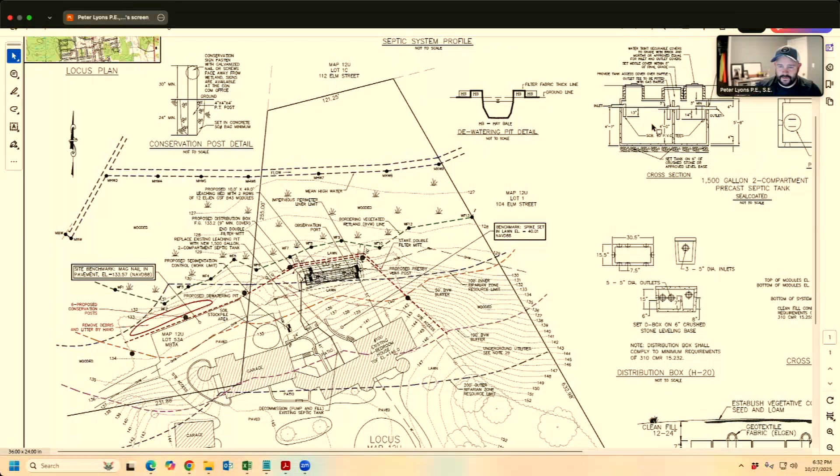As soon as you confirm we're looking at it, we'll dive in. I can see it, we can hear you. Cool, start whenever you'd like. All right, I'm ready. For the record, Peter Lyons with Collins Civil Engineering Group, representing the homeowner, Mr. Robert Langway.

We're here tonight for a notice of intent relative to the repair of a failed 4-bedroom septic system.

Looking at the plan, this is a very large property near Town Hall. This is 100 Elm Street, set on a 9.2 acre parcel set back to the north side of Elm Street.

In the back of the property, we have some mean high water delineations and the BVW associated with that. The BVW line is essentially at or just beyond the tree line in the rear of the property, delineated by Brook Monroe as flags 1 through 13.

The 50-foot buffer to that cuts the backyard in half, and the 100-foot falls through the middle of the house. The 100-foot from the mean high is right in the middle of the site where the leaching field's going, and the 200-foot outer riparian limit is at the front of the house.

The overall plan for this project is to replace all the existing septic components. If we start at the house, that'll explain why we're working towards the wetlands when we have all this property. The existing system—all the flow is combined in the house, and it comes out below grade, below the basement slab, into a septic tank and a leaching pit in the backyard.

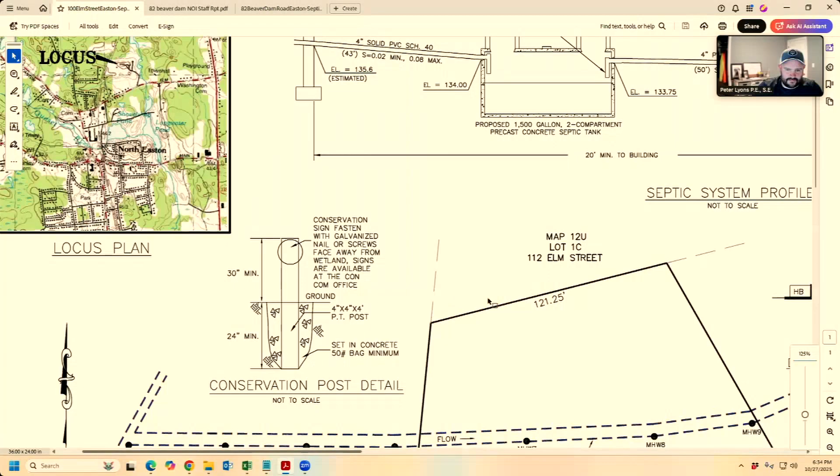I'm going to zoom in a little bit closer. Sorry for the bouncing around, but it's kind of a busy area. If we zoom in here, I just want to highlight there's a lot of underground utilities supplying from the west, supplying our property, as well as the property to the southeast. So there's some pretty heavy duty underground electric utilities crisscrossing through the backyard.

So the location we've chosen is within the 50-foot buffer to the BVW. However, it avoids the underground utilities.

As proposed, the leaching field is 21 feet off of approximately wetland flag 7. Erosion control is proposed at 10 feet off wetland flag 7. And in the vicinity of the work, we're doubling up the erosion control due to the steep topography.

Looking a little bit to the west here, this is an existing paved driveway that's going to be our site access, with a soil stockpiling area outside the 50-foot buffer, and some debris just off the pavement that are to be removed by hand.

We've provided conservation posts along basically the existing tree line. So we have conservation posts shown, and I think it's 7—1, 2, 3, 4, 5. Looks like 6 locations here.

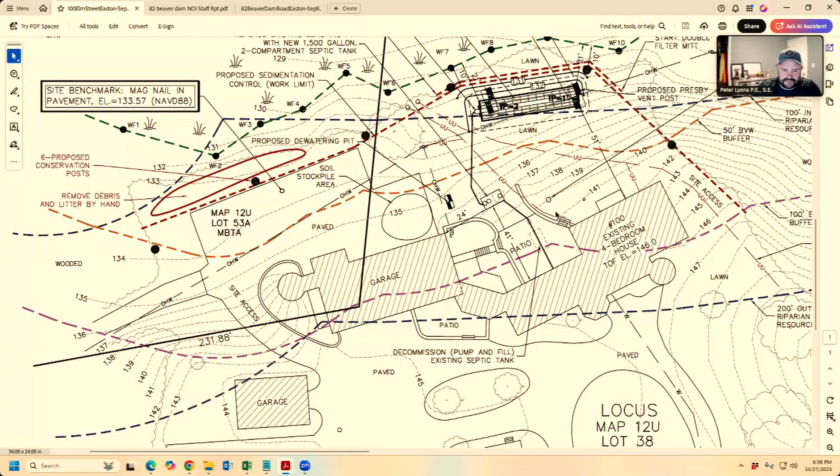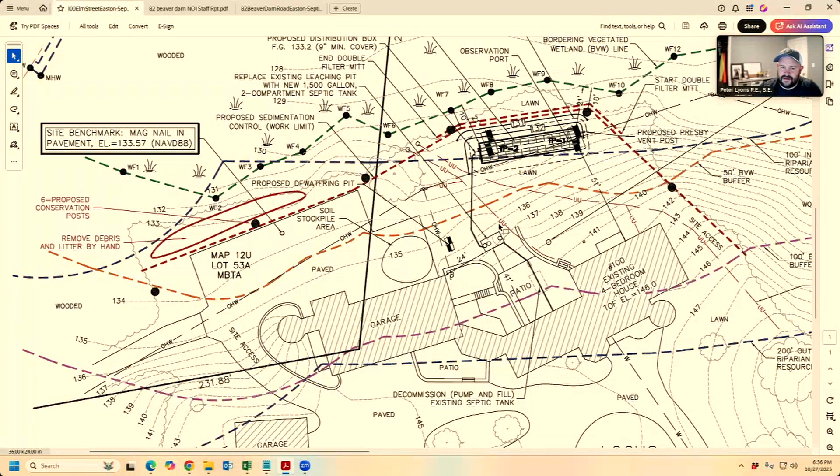Site access is going to be from the front around this paved area. There will be a little change in topography, about a foot, over the northern end of the septic system. This is all occurring in existing area. We're not anticipating the removal of any trees or vegetation associated with the construction or site access. We have provided a waiver for work within the 50-foot buffer to the BVW, indicating that it meets the public good requirement, benefit to the public good by updating a failed septic system in the vicinity of a wetland, in the buffer zone specifically.

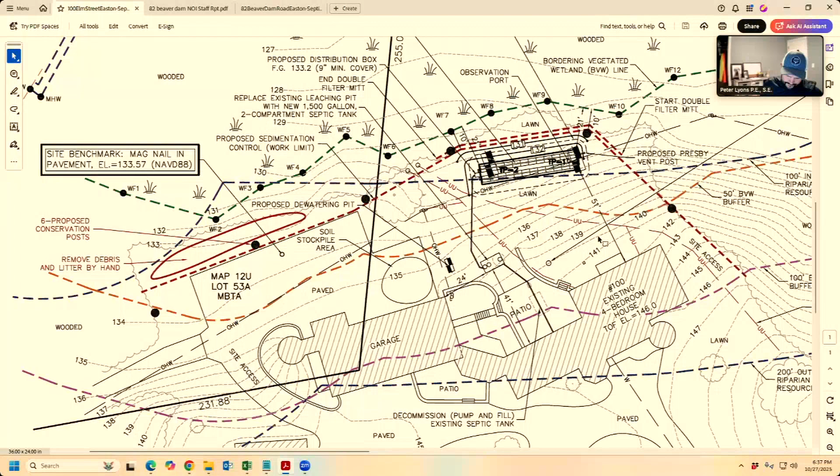Regarding the staff report and comments, just looking at this, I want to make sure this is the most recent plan, because it's not. There's a later plan, we proposed some plantings and stuff. Apologize on that, I can try to pull it up quick.

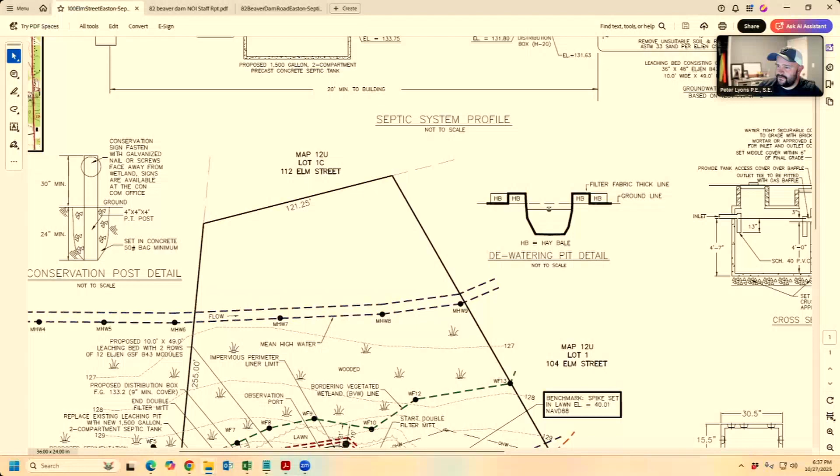While I work on that, does anyone have questions so far on this? My initial question was location of that system, but understanding the electrical situation, I don't have any additional questions. Jed, I think most of what you had is addressed by the updated plan we're about to see, but do you have anything else you want to add?

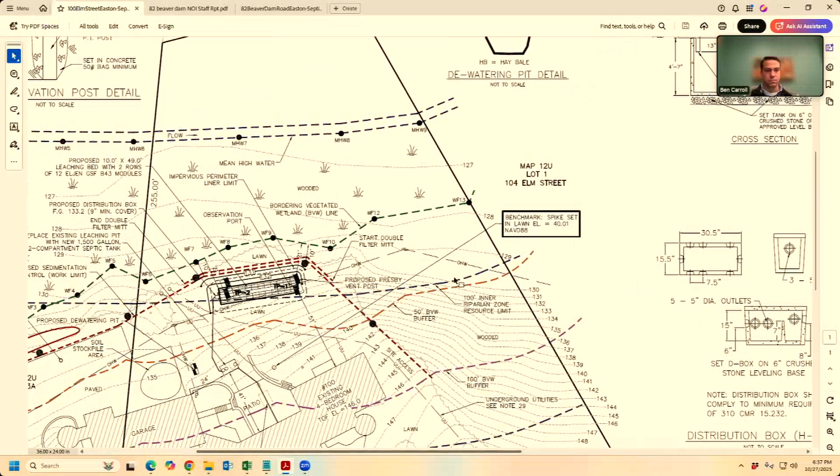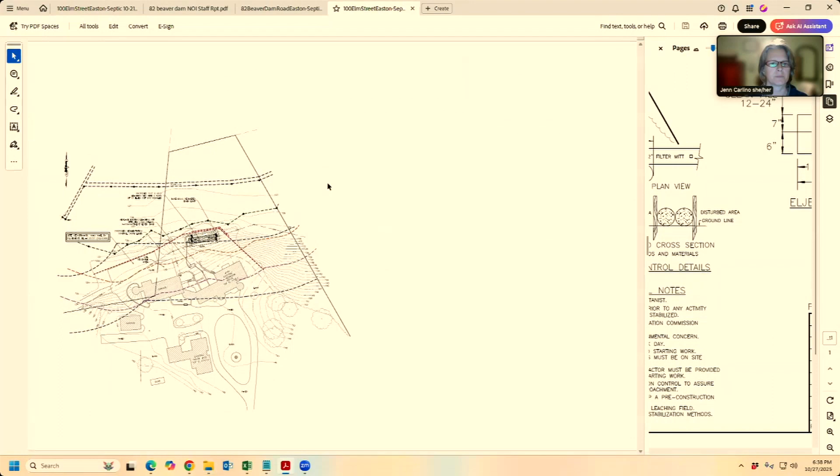Just a question. Peter mentioned the access would be through the parking area and the driveway on the left, but the plan says site access on the right. Is that changed on the revised plan?

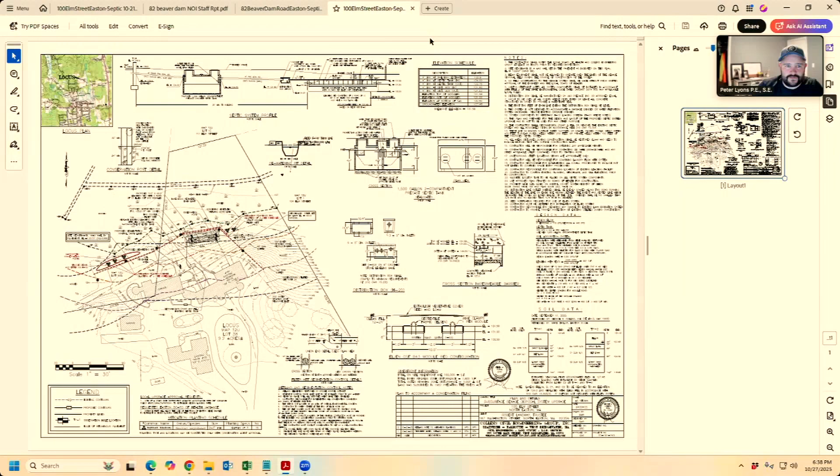Let me see, I just want to make sure I have the right plan up now. If you guys are looking at my screen, we should show two revisions. All right, cool, so I apologize getting back in on that. We will actually be accessing the site from the eastern side of the house. One of the big differences with this plan is we're proposing some mitigation plantings in the area of the debris removal over to the west, and then a secondary area adjacent or to the east of the existing septic system, right along the edge of lawn.

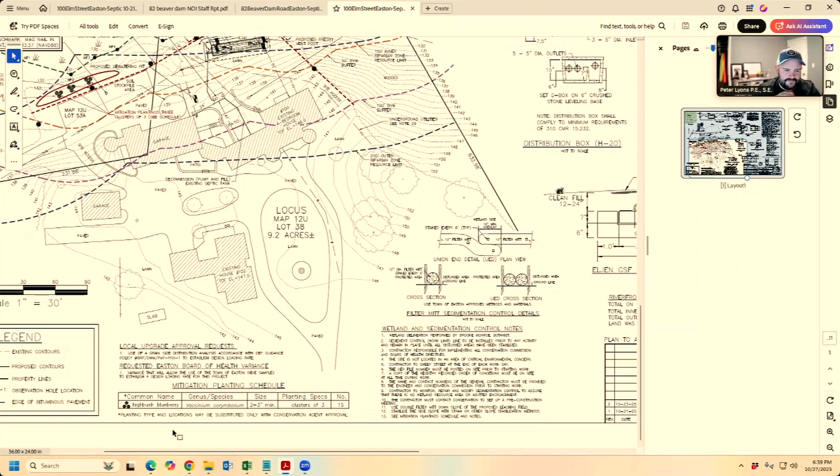What are we proposing there? We're just proposing 5 clusters of 3, for a total of 15 high bush blueberry shrubs, again just inside the existing tree line.

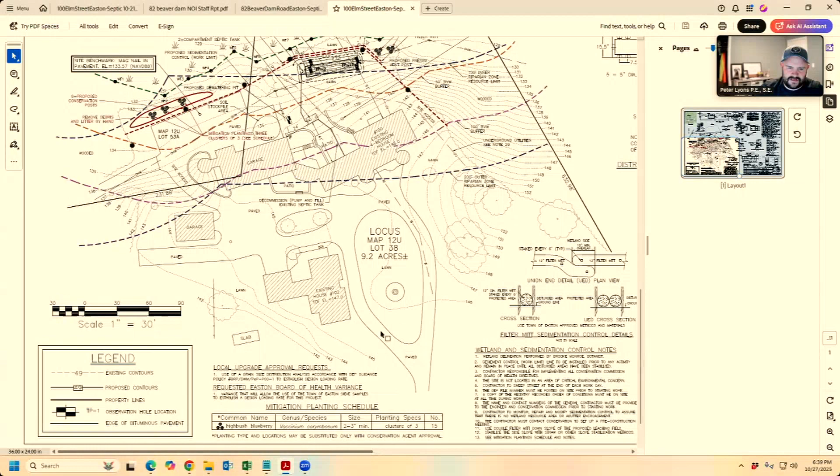Let's see, what else? I believe that addressed all or most of the staff report comments. If there was anything else I missed, or if the commission has any other questions on this, I'll try to address them.

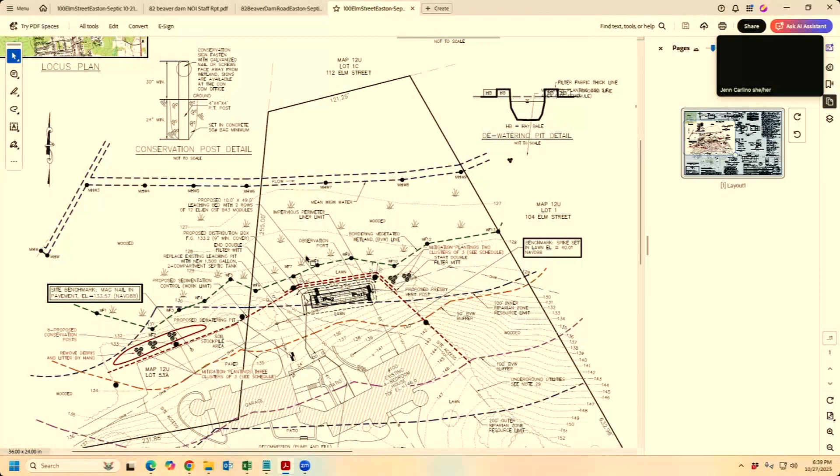Zoom back in on that for you. Any members of the commission have questions or comments regarding this project?

Just note that the septic plan has a liner, I'm not sure if you mentioned that before, Peter. I did not mention that, but yes, the septic plan has been revised to show an impermeable liner, or a barrier, 5 feet around the edge of the entire septic system, due to the proximity of the wetland being within the 50-foot buffer.

Thank you. Any members of the public have comments regarding 100 Elm Street? Nope.

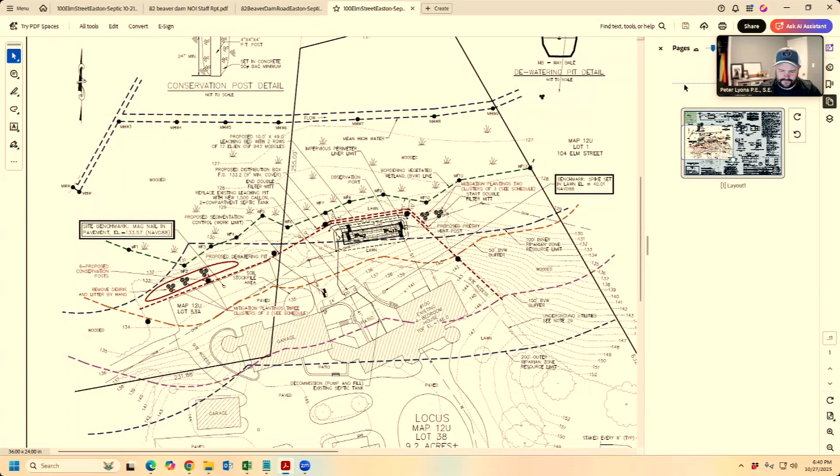Seeing none, Peter, I assume you'd like to close? Yes, please. Motion to close the public hearing for 100 Elm Street. Second. Carroll motion, Goodman second, roll call vote. Carroll, aye. Rossman, aye. Goodman, aye. Vecchio, aye.

Motion to issue an order of conditions and permit for work for 100 Elm Street. Vecchio, second. Carroll motion, Vecchio second, roll call vote. Carroll, aye. Rossman, aye. Goodman, aye. Vecchio, aye.

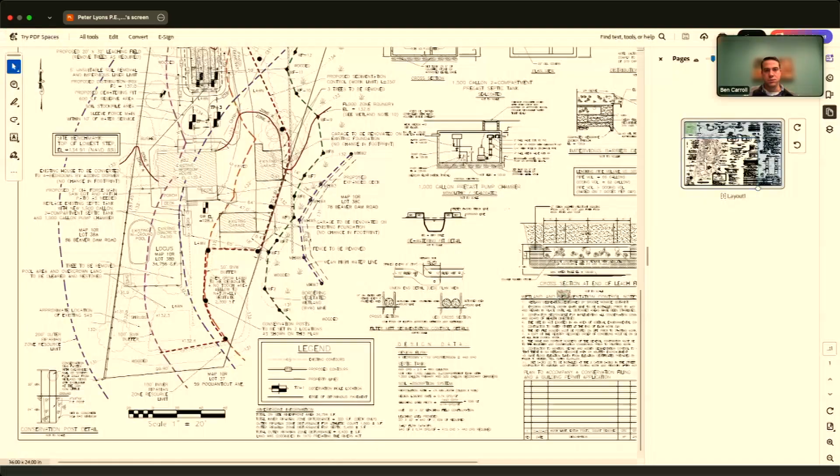Peter, I think we have you again next. Up next is 82 Beaver Dam. Notice of intent for the replacement of a residential septic system, proposed deck expansion, proposed 30 by 30 athletic court, tree removal, lawn restoration, and vegetation management, and renovation of 2 existing garages.

Correct, we should be looking at the plan. This is a pretty busy one, so we can try to walk through it. Again, for the record, Peter Lyons with Collins Civil Engineering Group. Notice of intent, as mentioned, for the replacement of a residential septic, proposed deck expansion. We are eliminating the proposed athletic court, but still looking at tree removal, lawn restoration, and some vegetation management, as well as the renovation of 2 existing garage structures.

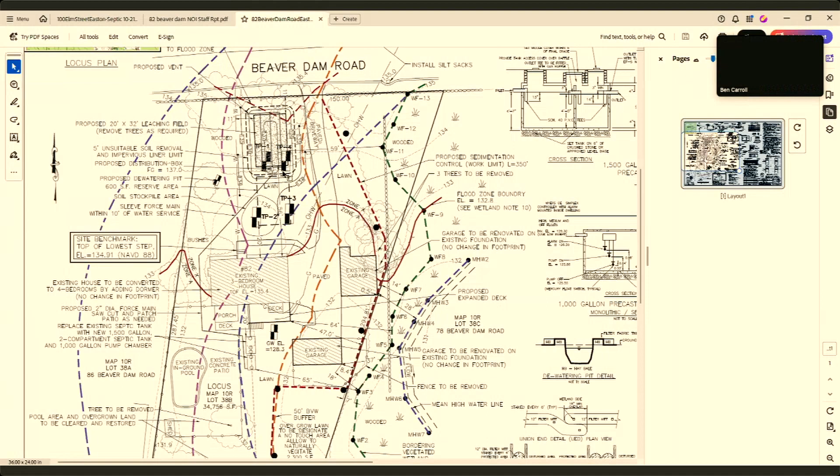Starting with a quick site overview, like we always do. Off to the east is MHW. Looks like we have 2 through 7 shown on the plan, and WF 1 through 13 shown. The property line falls just west of that. The septic system is currently coming out of the back of the house. There's a septic tank to a leaching field way out in the backyard.

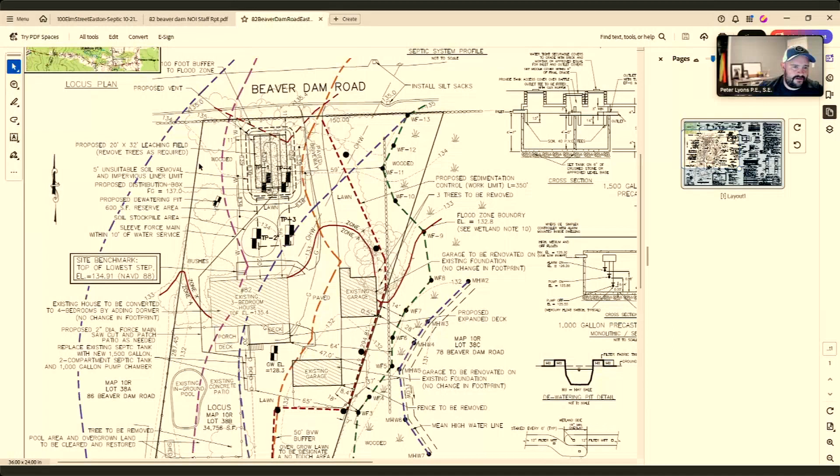Our proposal with this one is to replace the existing septic tank with a 1,500 gallon tank and pump chamber located approximately 65 feet from the wetlands. We're going to pump it up into the front yard, where we're showing a 20 by 32 foot leaching field, with an approximate 2 to 3 foot mound due to the high groundwater on the whole site.

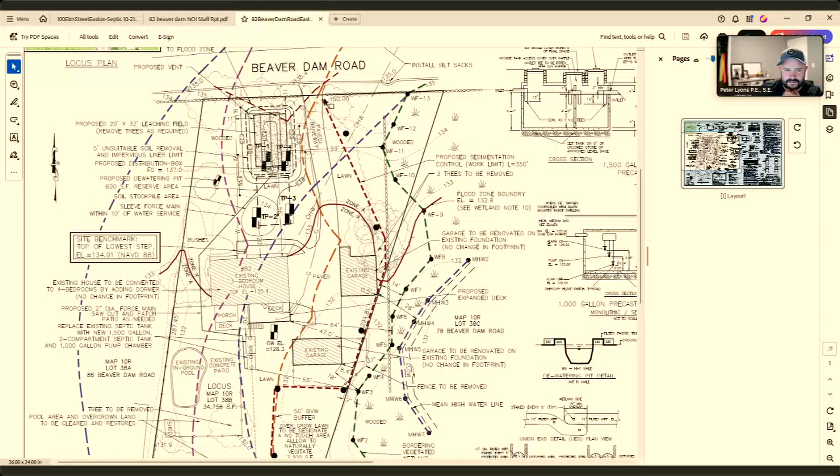The proposed leaching will be 59 feet from wetland flag 11. Erosion control is basically going to encompass all this work. So for the septic and access, it's going to be right up front. Erosion control wraps around the 2 garages to be proposed renovated.

In the back area, the existing lawn is really overgrown. The whole site hasn't really been maintained in some time. The contractor has cleared little paths for access, mostly to do the test pits.

With the existing garage structures, there were some questions on those. They're existing, they're going to remain in the same location. One is just going to be insulated, I believe that's the first one, with minimal actual exterior construction. The one in the rear is proposed to be reframed and reconstructed, but on the existing foundation, with the same dimensions and same or very similar overall height.

The garages are 28 feet and 18 feet off the BVW, but again, no change in footprint, no expansion of impervious areas associated with those.

Lastly, we will look at the deck off the back of the house. There's an existing deck and porch that we're proposing to expand, basically square it up with the existing corner of the house. That will be pervious, as it's just decking, so the rain will just go through. That is as close as 64 feet to the BVW.

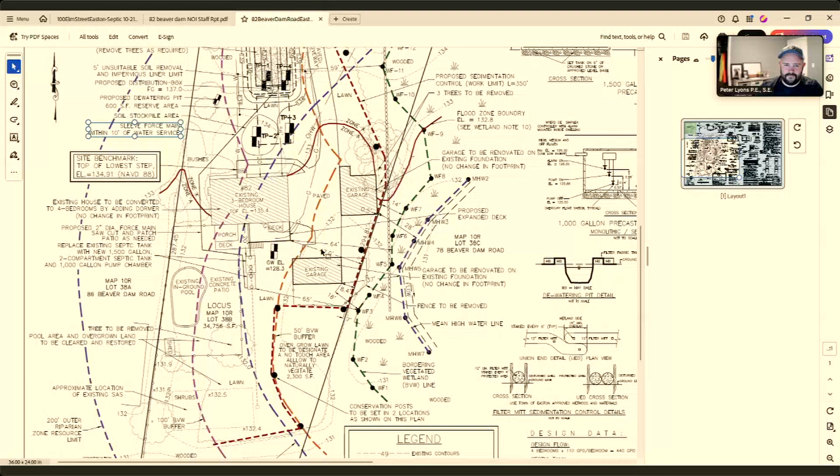Hello? Hi, Mr. Gomez, can you hear us? Yes, hello, I'm Ludi Gomez. Thank you. Would you please introduce yourself by name and address for the record? I'm Ludi Gomez, owner of 82 Beaver Dam Road in Easton.

Jennifer asked whether you've heard back from the building inspector about garage number 2. Yes, I went to the building department and spoke with the building inspector regarding the structure on the garage, right in front of the building coming inside, the middle garage. The framing is basically getting rebuilt. I explained to him and showed the plans, and he said as long as I keep the existing footing and foundation and just reframe it, I'm good. I just have to keep the same heights and the same structural layout. So no excavation, and it should be fine to go.

Okay, thank you. I don't know who has control over the cursor at the moment. Are we talking about rebuilding or reframing the garage to the north or the garage to the south? I believe it's this one here. Exactly, yes, correct. Okay, that was my only question. I'll just confirm with the building inspector.

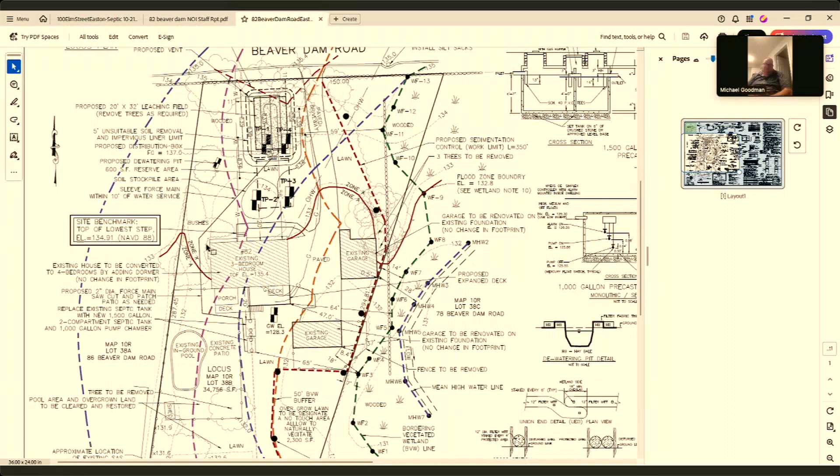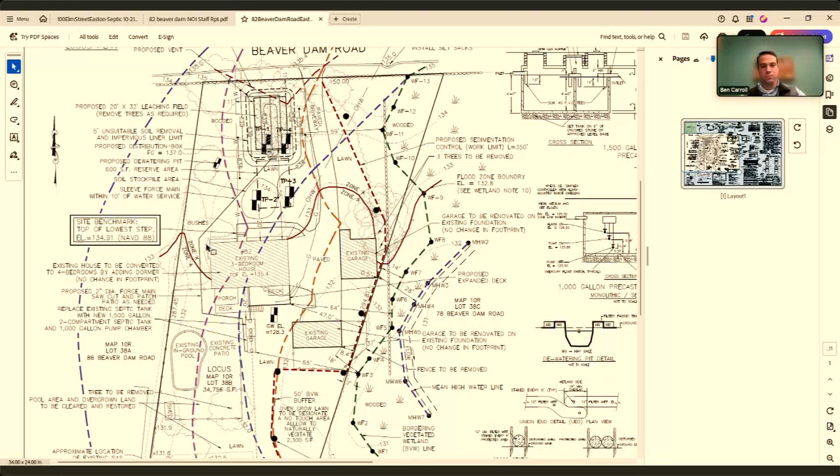Seeing no questions or comments from other members of the commission, any public comment here for 82 Beaver Dam? Nope. Seeing none, I assume you'd like to close?

Yes, please. Motion to close the public hearing for 82 Beaver Dam Road. Second. Carroll motion, who made the second? Crossman. Crossman, didn't recognize my name, my voice. You made it quick, Nate.

You made it quick. Roll call needed to vote. Carroll, aye. Crossman, aye. Goodman, aye. For the record, I did start the meeting when this started, so Spady aye. Vecchio, aye.

Motion to issue an order of conditions and permit for work for 82 Beaver Dam Road. Vecchio, second. Carroll motion, Vecchio second. Roll call vote. Carroll, aye. Crossman, aye. Goodman, aye. Spady, aye. Vecchio, aye.

Thank you. Mike, I didn't even see you join. Snuck right in. He's sneaky. That's how he catches those deer. Kinda.

All right, I got a COC in a bit, but I'll stay tuned. See you soon. Thank you. Thank you, next one will be much quicker. Thank you everyone, good luck. Thank you, good luck, sir. Very nice.

Up next is 40 Bristol Drive, and they have requested a continuance to November 17, 2025. So I'm going to make a motion. Motion to continue 40 Bristol Drive to the November 17 meeting of the Conservation Commission. Second. Carroll motion, Goodman second. Roll call vote. Carroll, aye. Crossman, aye. Goodman, aye. Spady, aye. Vecchio, aye.